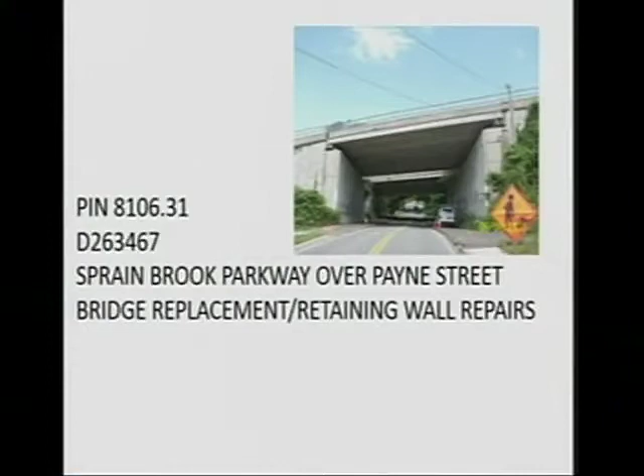So I'll let George go over a couple things. I'll go over the basics of the project, which we covered at the last meeting. It's essentially the same, so I'll breeze through it a bit, and I'll introduce Jimmy, the engineer in charge for the state.

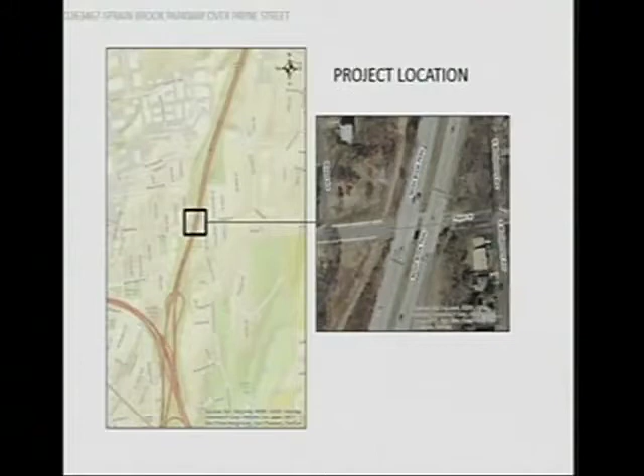Here's our project location. Interstate 287 is here, and the Payne Street Bridge is just to the north of that on the Sprain Brook Parkway. There's a northbound bridge and a southbound bridge that we're going to be working on.

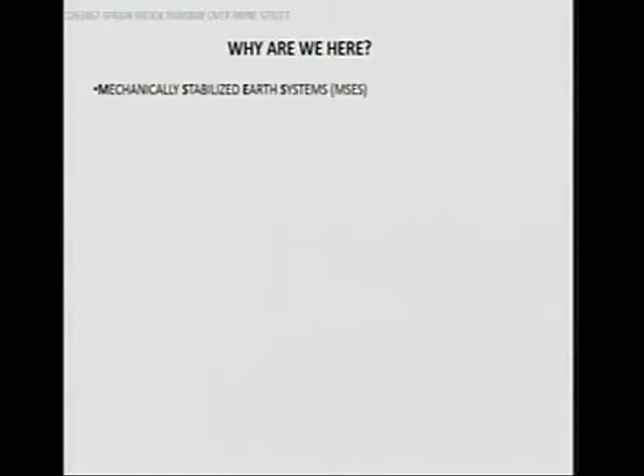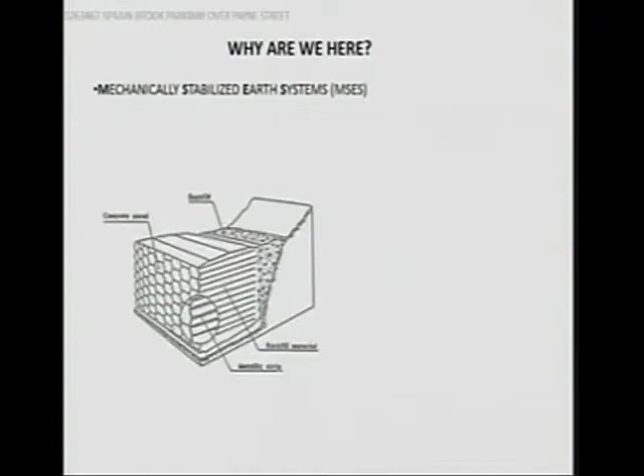There are retaining walls on either side of the Sprain Brook Parkway, called MSES walls. They're concrete panels held in by straps which extend into the roadway, underneath the roadway, and these straps anchor the panels which hold the soil back.

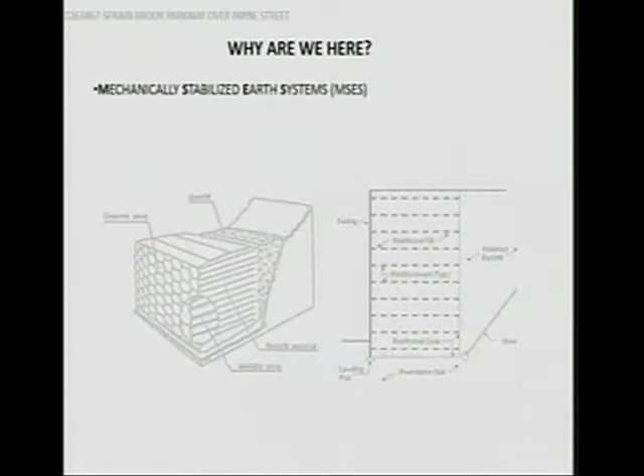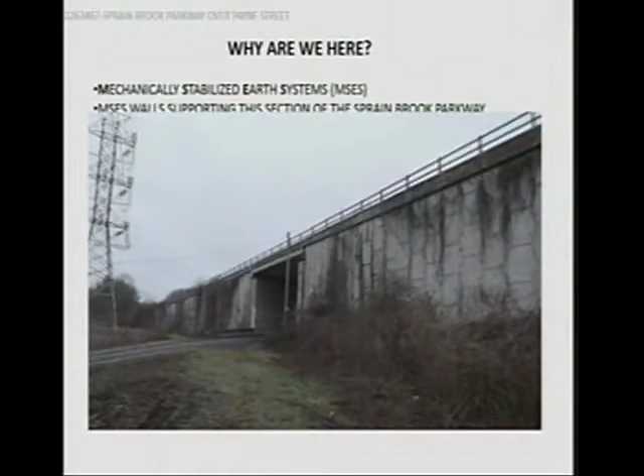We're having some problems with the walls at this location on the Sprain Brook Parkway. This is a before picture — you can see there are issues with the wall panels, some water coming through, and bulges in this area. Here's a close-up view before some of the panels came off.

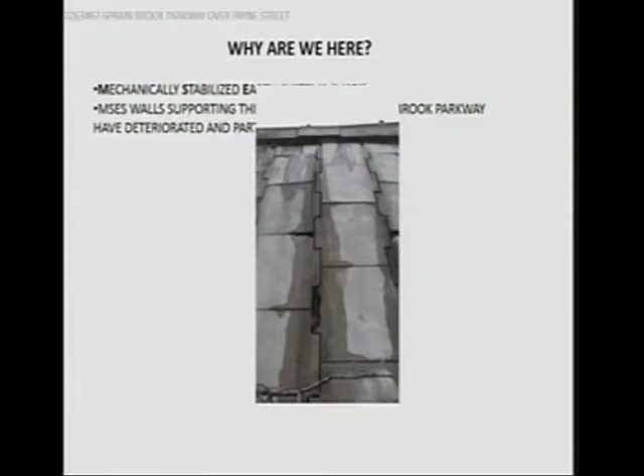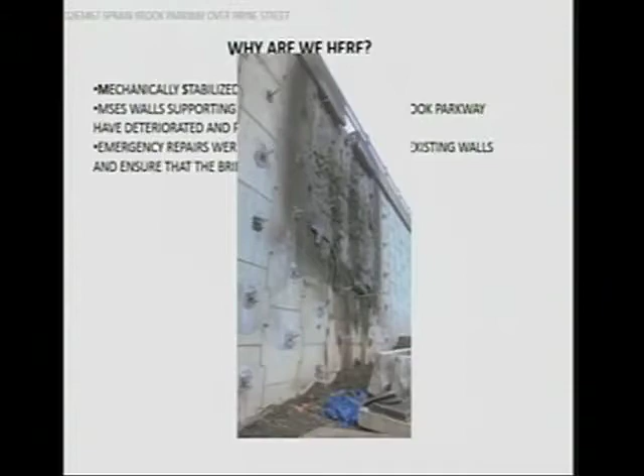So we did emergency repairs on the walls to stabilize them and ensure the bridges remain safe to travel. Where panels came off, we put in concrete with reinforcing, and soil nails, which are essentially big screws that hold the panels in place. Under the bridge, we put in temporary supports under the southbound bridge, which was most affected by the retaining walls.

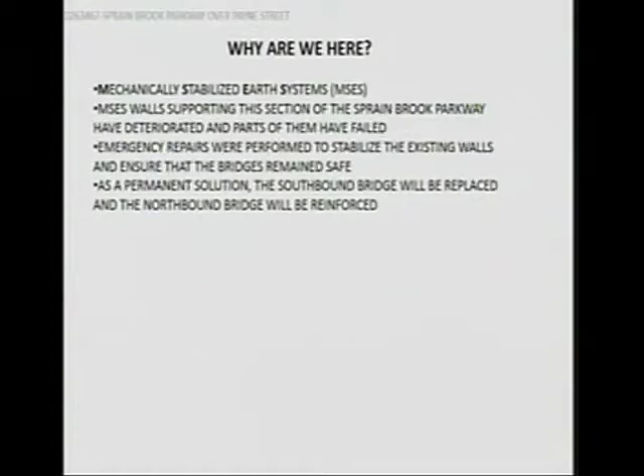Now, as a permanent solution, we're going to replace the southbound bridge, and we're also going to do some work under the northbound bridge to make sure that stays in good shape as well.

The bridge was constructed in 1980 with the whole section of the Sprain Brook Parkway, and currently carries three 12-foot lanes in each direction, a 10-foot right shoulder, and a 5.5-foot left shoulder. The span is about 70 feet, and the southbound bridge carries about 51,000 vehicles a day. Northbound is about the same.

We have a couple stages in the construction of the project. The first stage is to work on the crossovers of the median, north and south of the bridge. The second stage will be placing concrete barriers and more work in the median and crossovers.

There's an overhead sign structure just to the south of the bridge which will be removed to make room for the crossover on the south side. That'll be replaced after the project.

Stage 3, which will be the most impactful, involves closing the southbound bridge. We'll reduce the three lanes each direction to two lanes each direction, cross over the traffic from the southbound bridge onto the northbound side, and replace the southbound bridge.

We'll also do some work on Payne Street underneath the bridge. Once we complete the new bridge, we'll open it, remove the crossovers, restore the median, and finish up with the project.

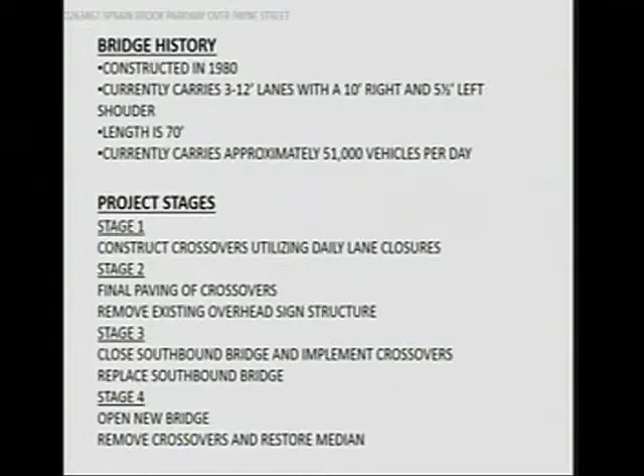So here's a general schedule. I'll let ECCO III talk about their plans for the specific dates of closures. The project was put out to bid April 20th. Stage 1 is to begin this summer — since we're in the summer now, they can give you a better idea. Stages 1, 2, and 3 will all be started this summer.

Stages 1 and 2 will be completed, and Stage 3 will begin in the summer — they're planning middle to end of August.

The new bridge is going to open this fall, it has to be complete this year. Traffic will be back to 3 lanes each direction this fall, and they'll finish up in the spring underneath Payne Street, restoring, planting, and getting everything back to the same as before.

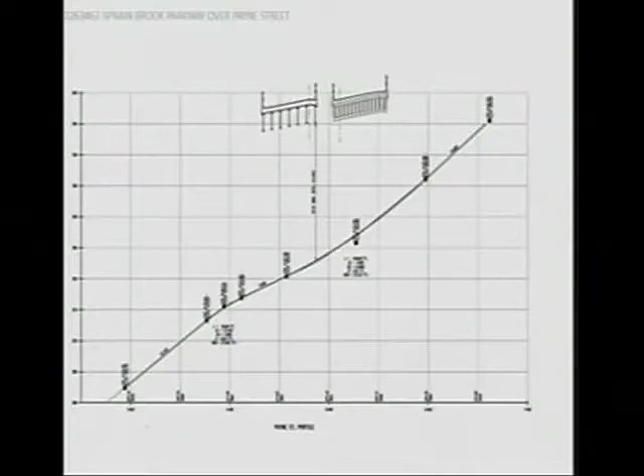Here's a profile view of Payne Street. Obviously it's a pretty steep grade there. This is the southbound bridge, which is being replaced, showing the new bridge, and the northbound bridge here, which is going to remain.

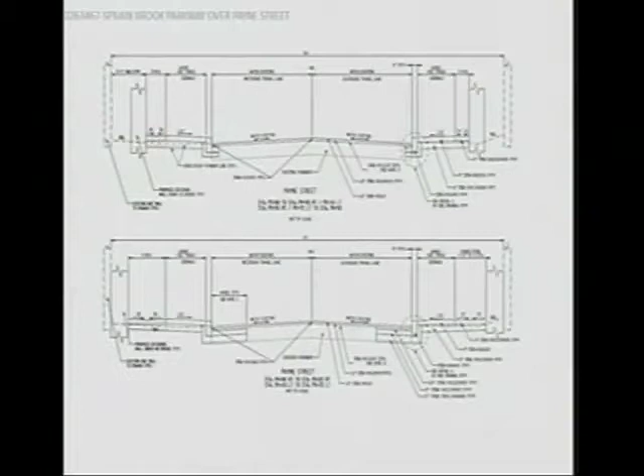This is a section of Payne Street, what it's going to look like when we're done. We're putting sidewalks on both sides of the roadway on the new bridge. Currently there are sidewalks on the approaches to the bridge, but it's just a big asphalt area underneath. Now we'll have actual sidewalks and curbs, and we'll be doing the pavement under the bridge also.

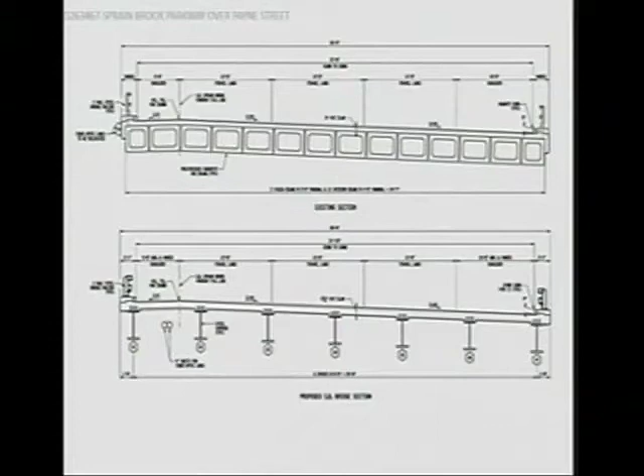This is a view of the bridge, showing the existing bridge, which is actually concrete boxes, and the lanes up top, and the bridge on the bottom, which is going to be on steel girders, pretty much the same width as the old bridge.

The northbound bridge, we're going to do some work on that. There's some issues with the deck, some cracks and stuff that we're going to be repairing, but that'll be done after the southbound bridge is replaced, and done at night with some lane closures.

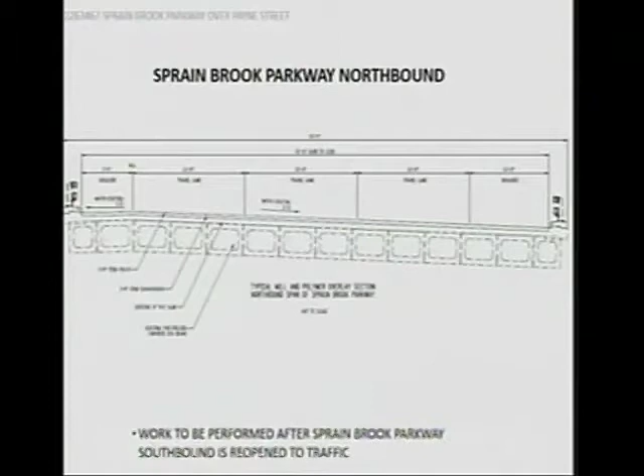So this is an overview of the bridge. The southbound side is here, the northbound side is here. Parkway is up top, Payne Street underneath, and we'll be putting some new retaining walls on either side to reinforce the existing walls. We're putting new walls underneath the bridge also, under both the northbound and southbound structures.

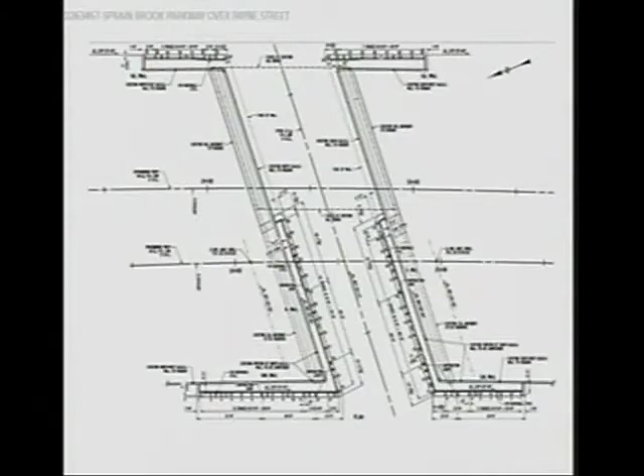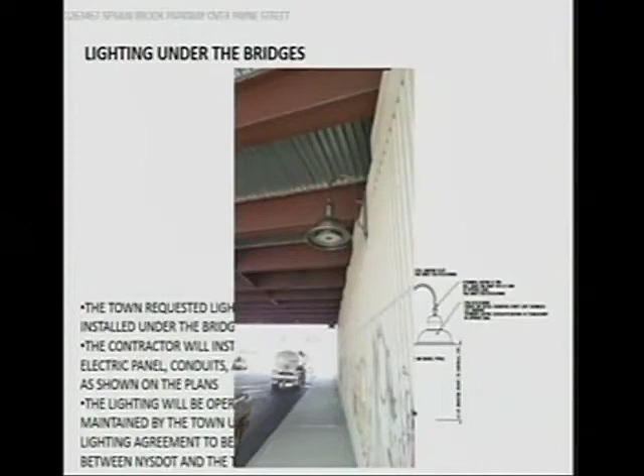We'll be putting lighting under the bridge also, that was requested by the town, and the contractor's going to install the lighting, conduits, and connect to the electrical service there. This is an idea of what the lights are going to look like, from another project, similar to this bridge.

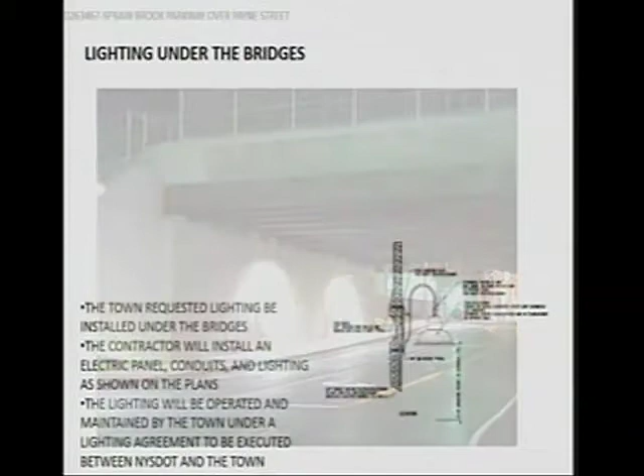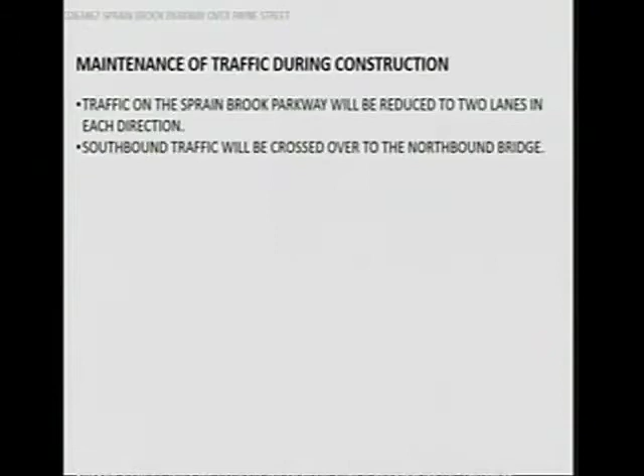So during construction, we're going to reduce to 2 lanes each direction on the parkway. Southbound traffic will cross over the northbound side and over the northbound bridge. Payne Street will be closed to traffic for a maximum of 180 days, that's what we put in the contract, though I believe Echo is proposing less than that, and I'll let them address that.

There's going to be a signed detour in place. Payne Street will be closed, and the detour will go around it, and I'll show you a schematic of how that's going to work. If somebody lives on or off Payne Street, it'll be open to local traffic, but you won't be able to go through under the bridge except for emergency vehicles. So if somebody is on the east side of Payne Street and wants to get to the west side of the Sprain Brook Parkway, they'll have to go around a different route.

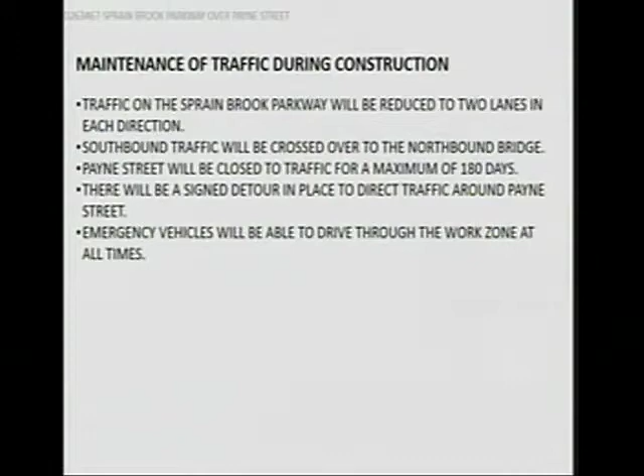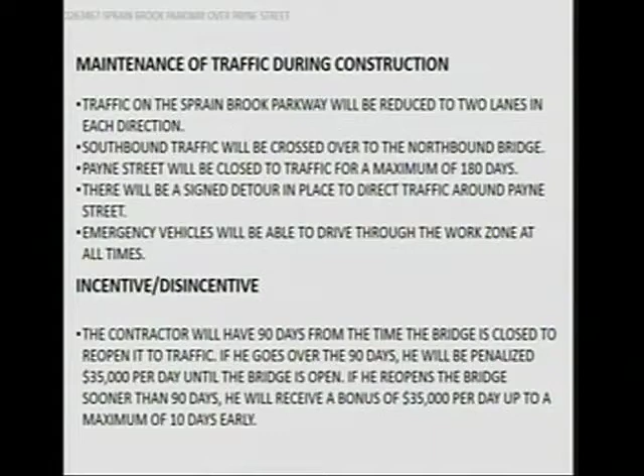Emergency vehicles will be able to access either side during construction. There's an incentive and disincentive for the contractor: once they close the bridge traffic on Sprain Brook Parkway, they have 90 days to reopen the new bridge to traffic. There's a bonus if they get it done early, and a penalty if they go over the 90-day period. They'll give you an idea of when they're looking to start, and once they start, they'll have 90 days to complete the project and get the bridge reopened to traffic.

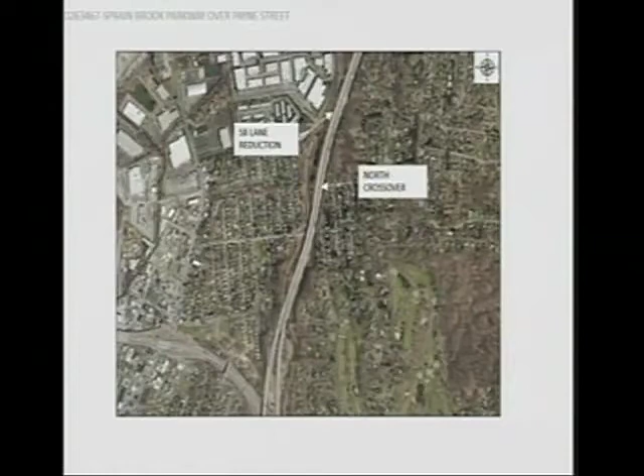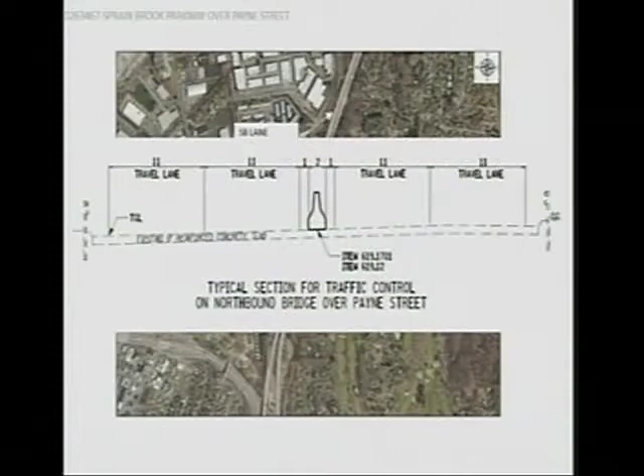Here's a little overview on a map. We're going to reduce southbound traffic to 2 lanes starting up here, and they'll cross over onto the north side. Here's the bridge, I'll go over the northbound bridge - this is what that'll look like. There'll be 2 lanes each direction over the bridge with a barrier in the middle, and then south of it, they'll cross back over onto the southbound side.

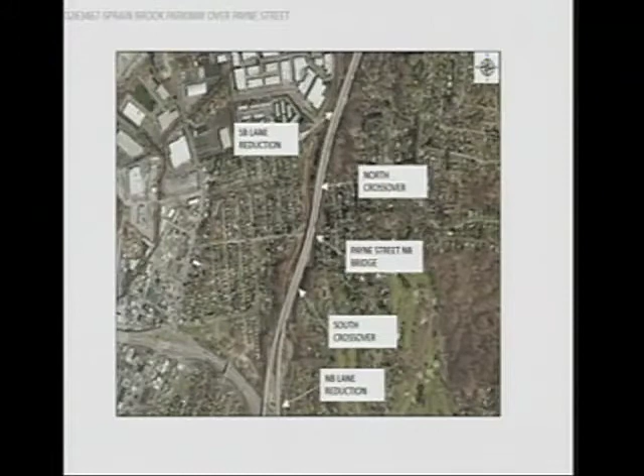And this is just in the northbound direction. It will be closed just north of the 287 interchange, reduced to 2 lanes northbound.

We have some strategies we use to manage traffic and delays. We'll have portable variable message signs deployed at key areas to inform motorists of closure dates prior to the project, and during the project they'll inform them of the closure and possible delays. We have about 12 or 13 PVMSs in the project, up and down the Sprain Brook Parkway, on the Sawmill Parkway, and I believe some on Route 100, and Echo can give you an idea of when they'll have those up and running.

We'll have the messages on there prior to the closure, giving motorists some time to plan for the delays. Existing permanent overhead signs on the roadway now will have messages about the project. We'll have them up and down the Sprain Brook Parkway and on 287, so people will know about the project and the closures. We have our Transportation Management Center, which will monitor traffic cameras and can adjust the messages if needed.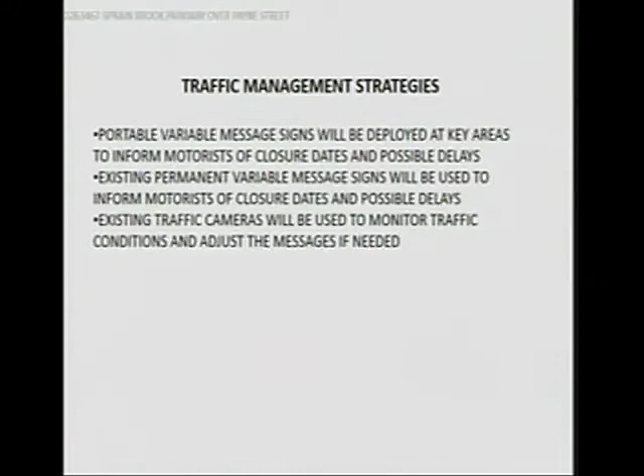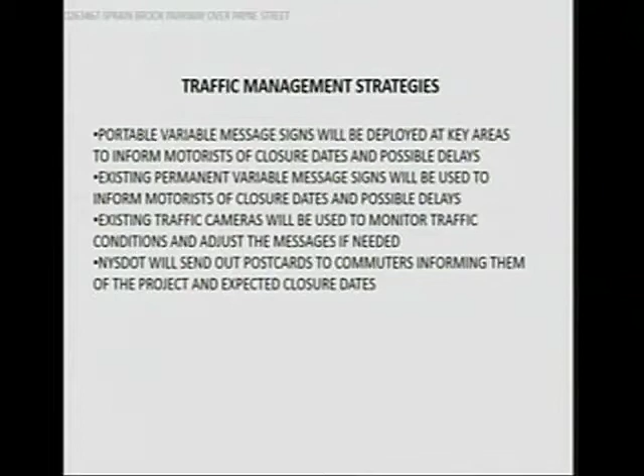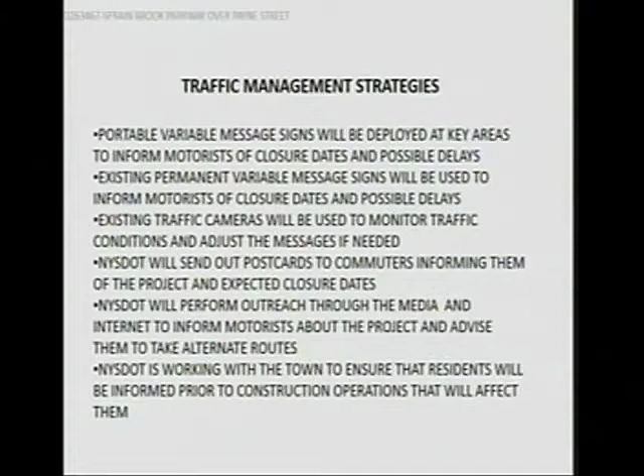We're going to be sending out postcards to commuters up and down the corridor, from Westchester all the way through Putnam and Dutchess counties, to let them know when the closure dates will be so they can adjust their travel routes. We're also going to perform outreach through the media and the internet to inform motorists, and we're working with the town to help notify residents and commuters when the operations will be in effect.

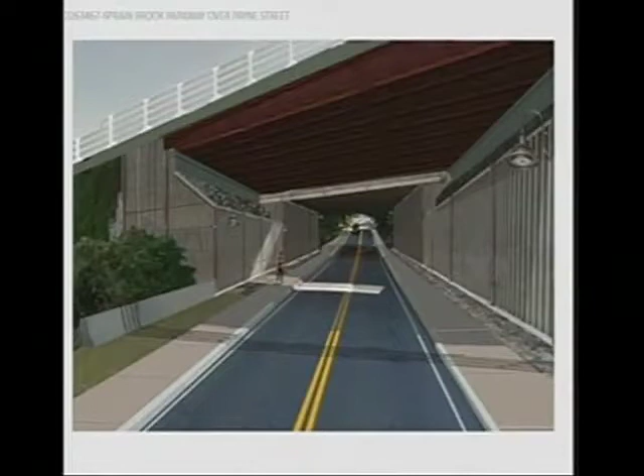And this is just a little visualization of what the new bridge will look like underneath. On Payne Street, you've got the sidewalks on either side, new retaining walls, and lighting on the bridge up top. So with that, I'll turn it over to Echo.

He's here. He's the engineer in charge for the project. He'll be the liaison to the town for any questions or issues with the project.

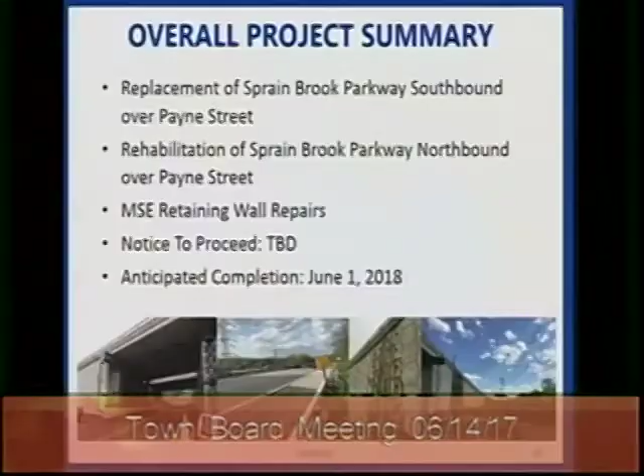Just to reiterate a little bit of what George was saying, here's an overall project summary. It's going to be replacing the Sprain Brook Parkway southbound over Payne Street, a rehab of the Sprain Brook Parkway northbound over Payne Street, and some MSE retaining wall repairs. Right now the notice to proceed is to be determined. This project has an anticipated completion date of June 1st, 2018.

What's the cost of this construction project? $15 million.

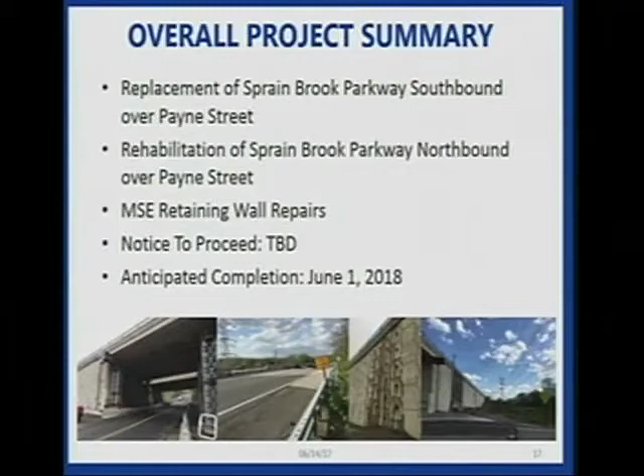We're going to be constructing new abutments, new superstructures, approach slabs, sidewalk and curbs, as well as installing new bridge railing and transition railing. We're also going to be installing H-pile retaining walls at the abutments and the west side wing walls.

The northbound Sprain Brook Parkway is a rehabilitation. We're going to be constructing new abutment footings and stems, as well as installing new H-pile retaining walls along the east wing walls. The northbound rehabilitation also includes resurfacing of the existing bridge deck, which is just a polymer overlay wearing surface that we're going to be installing.

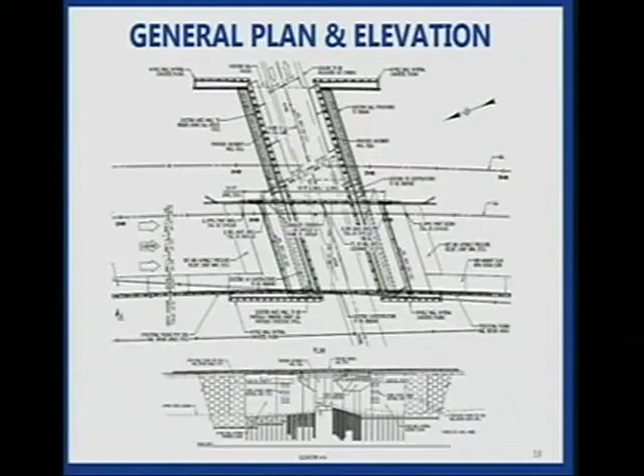The MSE wall repairs will consist of a structural facing that we're going to be putting on the face of the walls. There are two wall repair areas at this site, and another wall repair area on the Sawmill Parkway.

As George mentioned, there's a 90-day work period. This contract calls for implementing a crossover of southbound traffic to northbound. So in stage 2, we'll be constructing this crossover, placing a temporary concrete barrier along the left shoulders of northbound and southbound Sprain Brook Parkway, establishing a work zone in the median. We anticipate that happening in July into August as well. At that time we'll also be mobilizing to start installation of the H-pile retaining walls at the west side and east side wing walls.

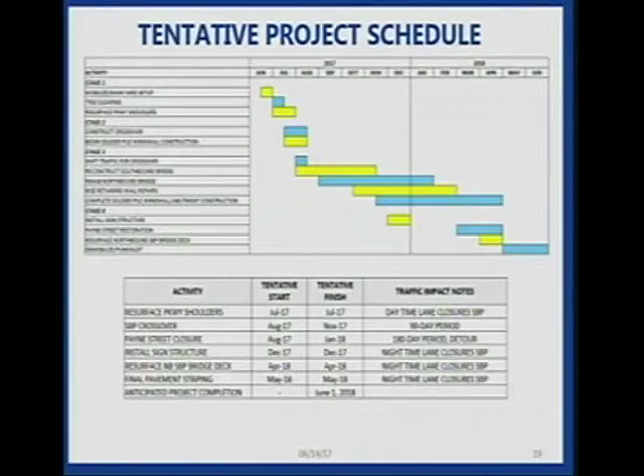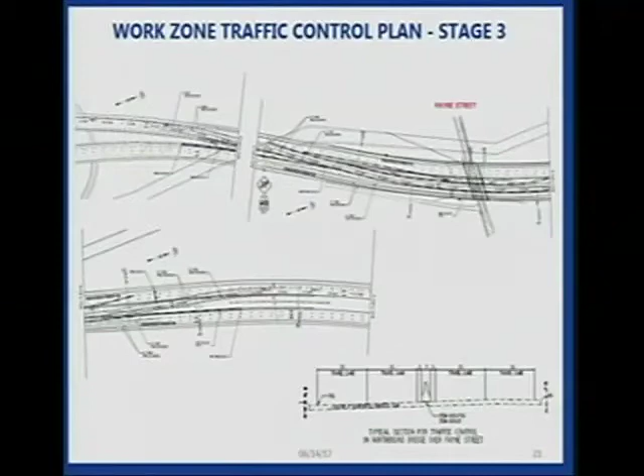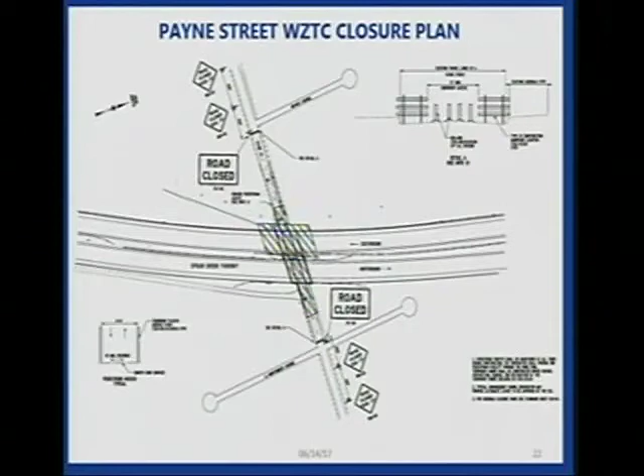This is the Payne Street closure work zone traffic control plan. On the east side of the Sprain Brook Parkway, Payne Street is going to be restricted to vehicle access just west of South Montgomery Street. On the west side of the Sprain Brook Parkway, vehicle access is going to be restricted just east of Bryan Avenue. Pedestrian access will be maintained through all construction activities on Payne Street.

Excuse me, you're too close to the microphone. It'll pick you up, you could stand up.

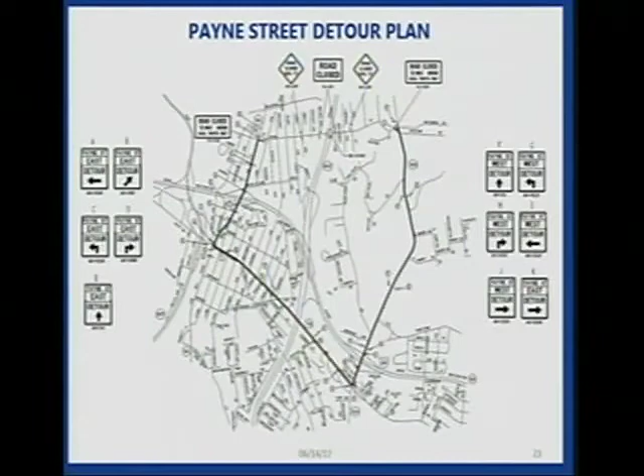So in summary, for the project we'll have a 90-day period on the Sprain Brook Parkway where we'll have a major impact on commuters and traffic. We know it will cause substantial backups. The outreach plan, which is part of starting here with our postcards and our public outreach, is to try to get people to drive at different times or take different routes. We know it may have an impact on the local community here because people get stuck in traffic and tend to just take the nearest exit and try to find a way around.

In addition, we know we'll have an impact along the Payne Street corridor here in Greenburgh. The contractor will be on the ground with his trailers and equipment, doing a lot of the work from the Payne Street level. Our trailers and equipment will be kept there. To complete this work in a short period of time, it'll be more than a 40-hour work week. We'll probably be working double shifts most of the 90 days to meet the deadlines.

What time in the evening will they stop? Well, we're going to work longer shifts. We probably won't be stopping at night, but we have noise orders to follow. We're going to follow the noise orders. So you're going to go like 24 hours? Probably two 10-hour shifts, so it wouldn't be full 24 hours.

Would you anticipate that any of the immediate neighbors would be inconvenienced by noise or lighting? We're going to do our best to prevent that.

We'll do our best, and part of what we want to do here is introduce Paul and Tom for Echo Industries, who will have the trailer on site here. And for the DOT, Jimmy will be our engineer on the ground every day, and we have Hans, the construction supervisor, who will be in charge. We'll get you, the town, and the village of Elmsford, all their contact numbers, so when issues come up you'll know who to contact to try to best resolve whatever things come up during construction.

Is there going to- I know we've had some other bridges in the town where they've done work, and there are periods where it's noisy. I remember the one off the Bronx River Parkway last year where people were complaining about a lot of noise or sound or lighting initially. Are there going to be periods where there's going to be more noise and more lighting, or is it going to be pretty much the same the whole construction?